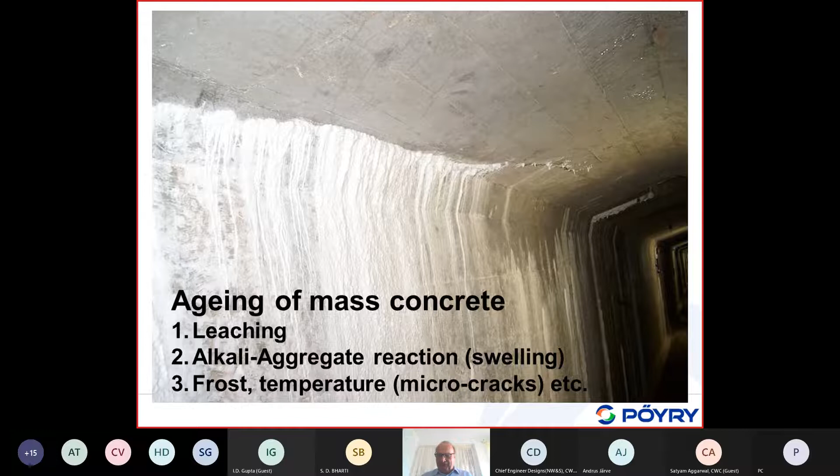If we look into some existing dams, we may see cracks developing in concrete dams, top gallery dams, some cracks here mainly due to temperature effects. We have some leaching, or we can have alkali aggregate reaction causing swelling, or sulfate reaction in the concrete also causing swelling, and we can have frost temperature effects which cause micro cracks, basically on the surface, which will damage the surface concrete. So aging of mass concrete is one factor which is important and has to be considered.

What is the basic requirement? If we do some modifications of the dam, they are the following. Number one, the dam must satisfy today's design criteria, that means the hydrological, for example PMF, and seismic safety evaluation earthquake design criteria. Often the seismic load case has not been considered properly in older dams, as I mentioned already, so it is really necessary to do the seismic analysis if you are doing a dam heightening project. Number two, we would like to achieve that the heightened dam acts as a monolithic structure, as I've mentioned before. Number three, safety assessment of the old dam according to today's requirements. The question is, can the old dam carry the extra load?

It is important that we use today's design criteria for old dams. Some people may feel that if you do some modifications on your dam, you can still stick to your old design criteria. I think this is not correct according to ICOLD, but for some dam owners, if they want to do just the minimum, they may be tempted to argue in this way, but you should not accept that. Number four, safety of the existing dam usually decreases if you do some heightening, due to the extra water load and dead load. It is clear that if you heighten an existing dam without really strengthening the overall dam body, just adding some extra height on top, your safety will go down. It's clear.

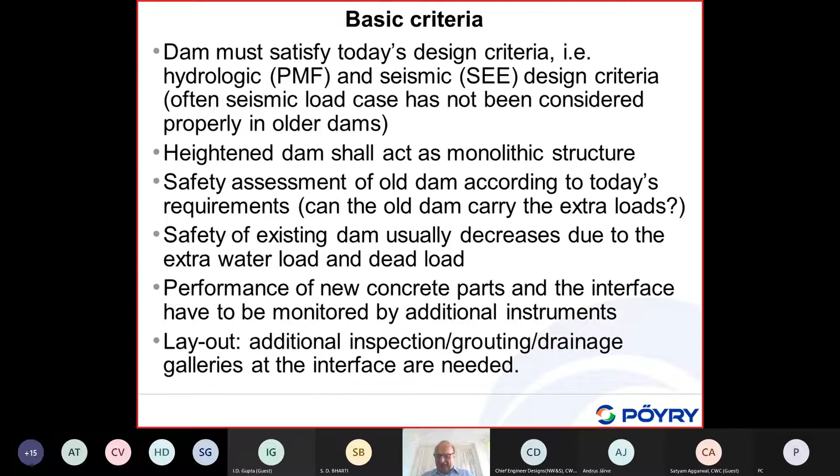And of course, if you do some dam heightening, it means you also have to do some modifications, usually with your spillway. If it is a gated or ungated spillway, you have to modify that. So it has implications not only on the dam body, but also on some other parts.

Why do we need dam heightening? As I've mentioned a few times, when dams are properly well-built and well-designed, and are properly maintained, they have a very long, unlimited service life. I would say the service life may exceed 100 years if you do not have deficiencies like aging, alkali-silicate reaction, or sulfate reaction.

Number two, the use of a dam and its reservoir may change during the economical life, and extra storage may be needed, for example due to sedimentation. We have that in Iran, in one dam project I'm involved in - the sedimentation level is 100 meters thick at the dam body, and the dam itself is 200 meters high.

Or we need some extra volume in the reservoir for flood control - extra retention volume in an existing dam, which we have done in Switzerland - or we need some extra water storage. So there are a number of reasons why people feel heightening of a dam is a viable option.

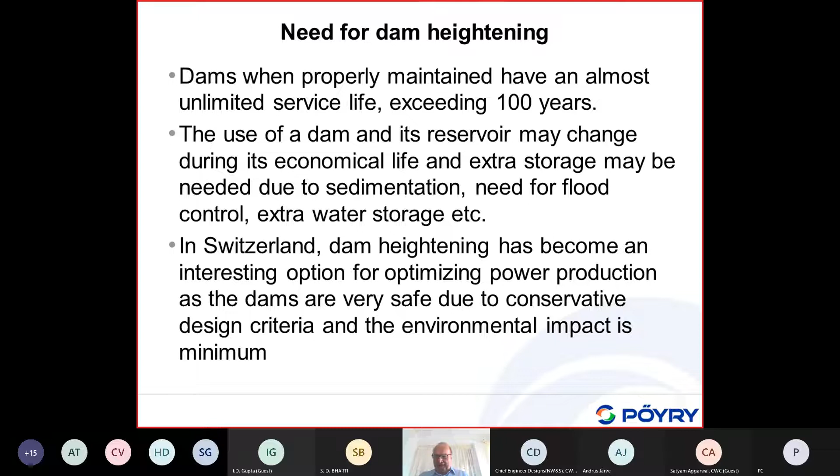In some other parts, I've been involved in a project in Sudan, between Blue Nile and White Nile. It is absolutely flat, with some cataracts. They heightened the dam by 10 meters, and the reservoir area doubled - basically the reservoir became very large, from roughly 300 square kilometers to 600 square kilometers. A huge increase only due to 10 meters, whereas in Switzerland, if we increase 10 meters, maybe we only need a few hectares of extra land. I will show one example.

What are some technical aspects with the heightening at the interface of old and new concrete? About 0.5 to 1 meter of the existing concrete dam has to be removed, as this layer may be damaged by micro cracks due to temperature, climatic conditions, and depending on the properties of the mass concrete.

We also have to look that we do not have any buildup of pore pressure at the interface between old and new, and it has to be checked by drainage, because if you have extra water pressure, it may create some unsafe conditions.

Number 3, old concrete may be permeable, and water may circulate along lift and temporary construction joints. So therefore, water tightness has to be achieved, for example by grouting of the old concrete. It is required, if you do heightening, that a clear concept be established.

Also, the extra hydrostatic pressure depends, of course, on how much the dam will be heightened. We may require modification in the grout curtain. And I would say, without changing basically the dam geometry, we can do dam heightening in the order of 1 to 1.5 times the crest width. So we think this is just a rule of thumb.

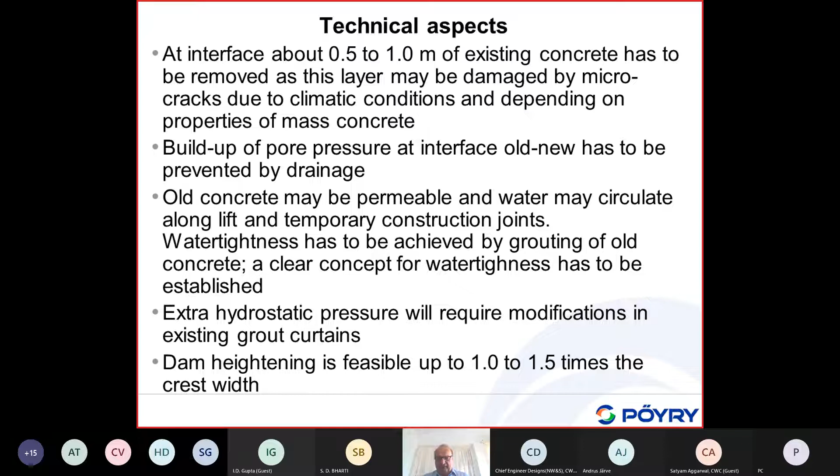If your existing dam has a crest thickness of only 4 meters, I think it is very problematic if you cannot heighten just by 10 meters. I would say feasible would be about 4 to 6 meters. But our dams in Switzerland have a crest thickness, as I will show.

What are a few further technical aspects? Timing of concreting has to be investigated in view of climatic conditions. In our case, in the mountains, and also here in India, in the Himalayas, you may have a working period per year of maybe only a few months.

So the next one is the bonding options of new and old concrete. How do you do that? One can do it by anchors, by dowels of new and old concrete, and by treatment of the interface with some kind of epoxy mortar or other techniques. These are possible solutions.

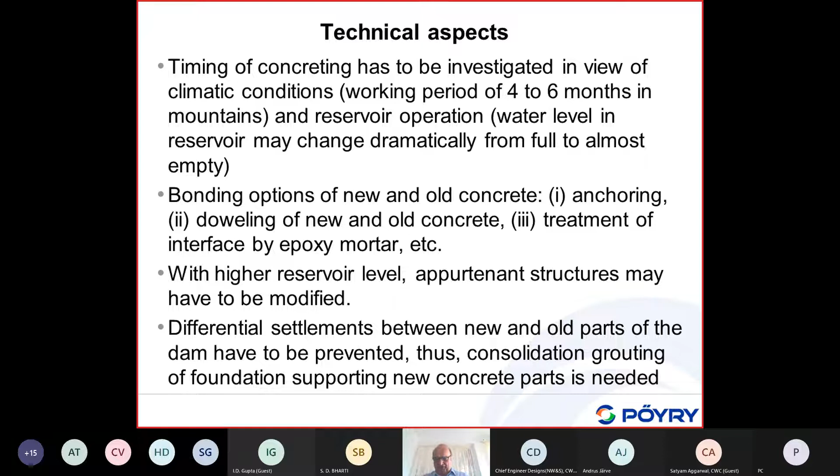With higher reservoir level, as I mentioned, appurtenant structures and spillways may have to be modified as well. Another point is related to differential settlements between new and old parts of a dam, which have to be prevented. Therefore, some consolidation grouting of a foundation supporting the new concrete parts is needed. So these are some of the technical issues which have to be addressed.

If you do modifications of the dam, you must do it according to today's design and safety criteria. What are some techniques for dam heightening? I will give a few examples.

Number one, rock anchors and post-tension anchors. Number two, shear keys at horizontal interfaces—it can be without anchor at the interface of old and new concrete, or with anchor between old and new concrete. There could be a provision of a slot between old and new concrete, or other techniques with separation of old and new concrete by a membrane.

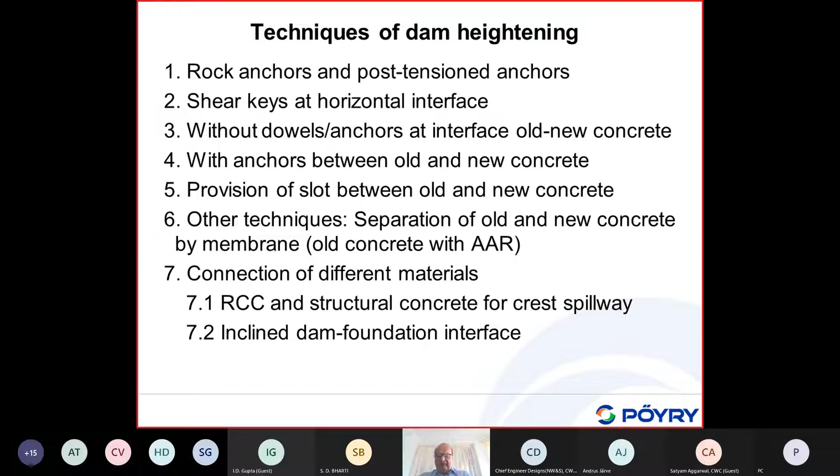For example, if you have special problems—and number seven is the connection of different types of materials, RCC and structural concrete. If you have an RCC dam body, the spillway will still be made of structural concrete, meaning reinforced concrete. So we have the interface between the spillway structure, usually a crest spillway in an RCC gravity dam, and the dam body, and we have some connections with inclined dam foundation interfaces.

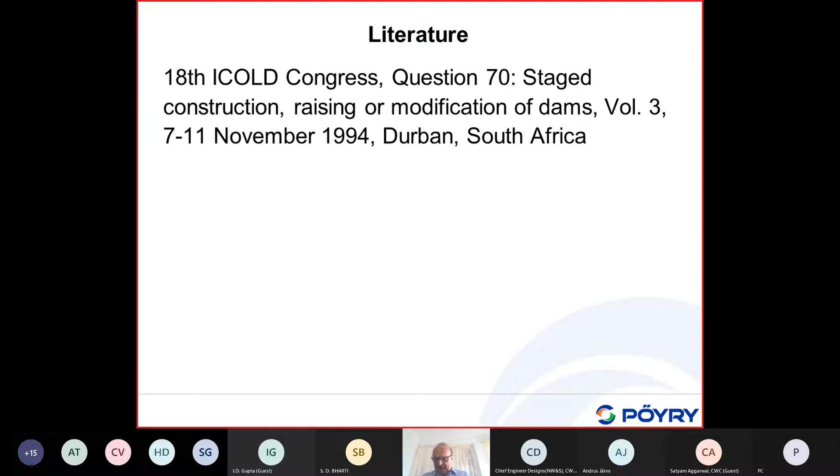I will show a few examples. Quite useful if somebody is interested is a book from one of the ICOLD congresses, the 18th congress in Durban, South Africa—already 27 years old—dealing with raising or modification of dams. If you want information on executed problems, I'd refer to that very comprehensive volume, maybe 600 or more pages, where you find a number of cases.

So let me come briefly through different types of dam heightening techniques. This is a dam which has been heightened—the whole dam body has been heightened, and as you see, it has been raised from water level 298 to 321, so 23 meters, which is quite a bit. This could be a solution here.

It is an old masonry dam, where the height was increased by adding a concrete part at the dam body. The geometry has been expanded more or less linearly with the heightening. The other approach I mentioned, what would be feasible, is 1.0 to 1.5 times the crest width—that would be heightening of a dam just locally without making all these modifications.

If you do this modification, you can heighten much more, but the problem, as indicated, is basically this interface between old and new concrete. There are also, as you see in this example, different additional works necessary with the upstream facing, the grout curtain, and the drainage system.

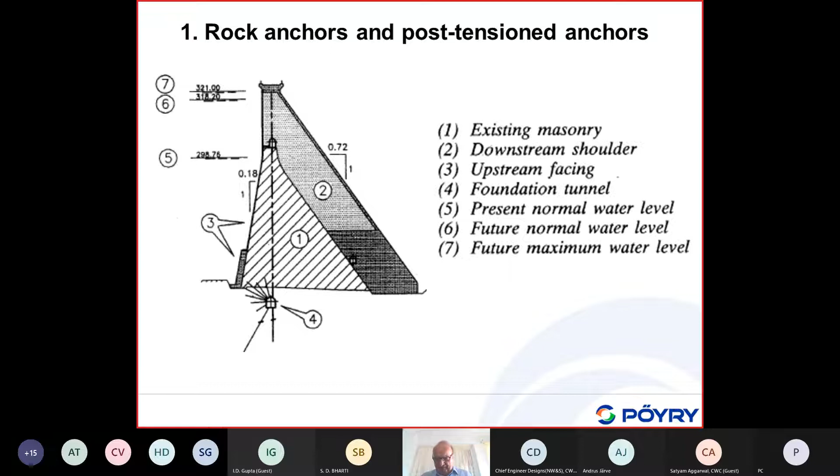This is a dam which also has been heightened—I almost forgot, this was connected with rock anchors. Rock anchors have been provided, so by post-tensioning you can achieve compression and a good bond at this interface, which we saw this morning. The lift joints are usually weak points under dynamic actions.

This is another example with post-tensioning heightening, where only the top portion has been increased, about 10 meters of water level. But the dam crest was already quite thin, so a modification was done, and I must say the shape now doesn't look very favorable.

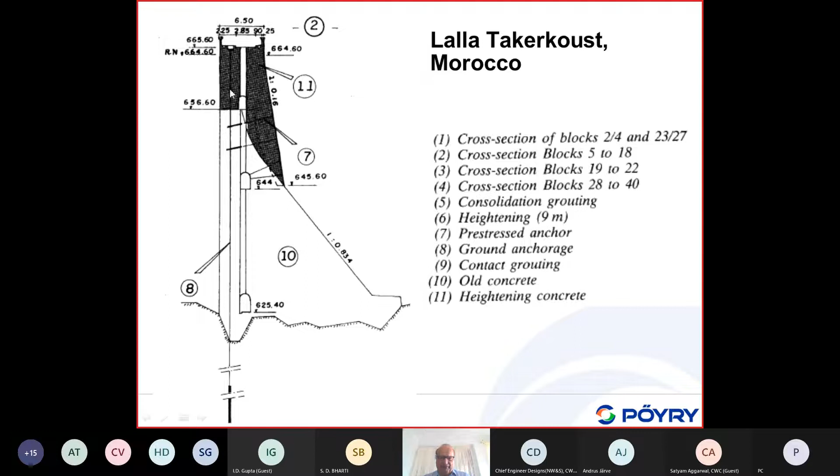It looks more like the Koyna gravity arch dam, where some cracks also developed, where people heightened the dam—it was decided to heighten it during construction, giving it this shape. This dam in Morocco looks quite similar, showing how this heightening is done at the crown cantilever, the highest cantilever, and closer to the abutment where the addition of concrete is more prominent than in the center part of the dam.

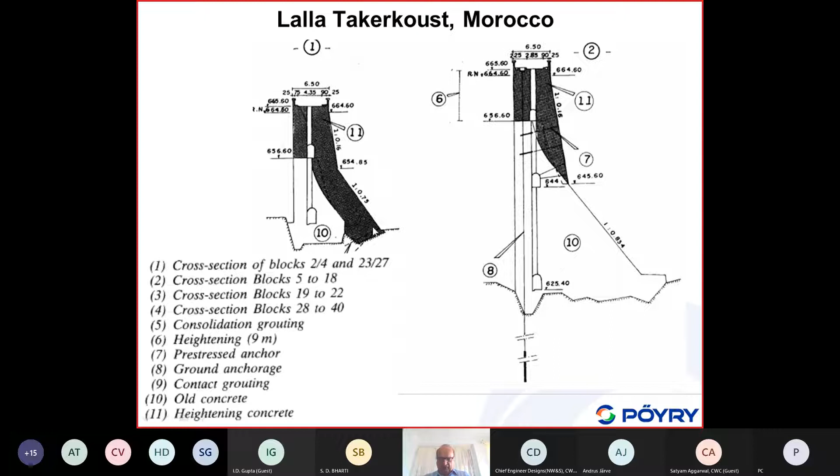Here it involves modification of the cross section, of course, near the abutments. Okay, some further details here about this post-tensioning of the dam.

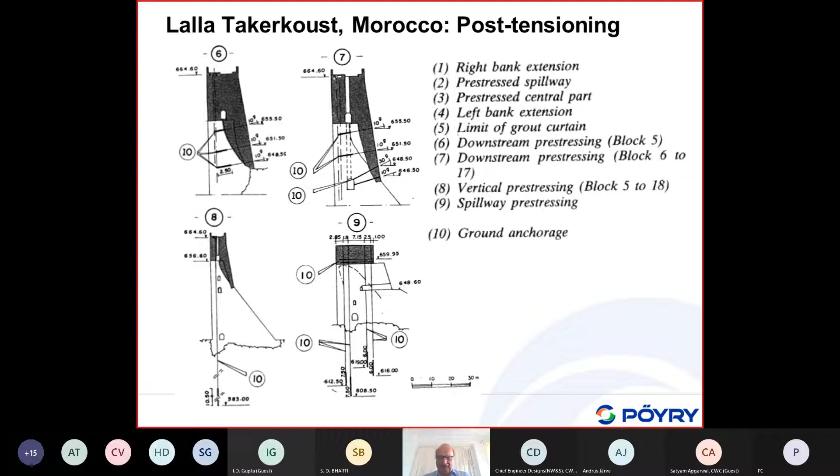I'll go quickly through that and move to the second option: shear keys. This is a dam now in Switzerland, the Mauvoisin arch dam. It had a thickness here of about 12 meters, so it is quite high. With 12 meters, we can heighten without problems 1.0 to 1.5 times the thickness. So this dam was heightened by 13.5 meters, which is roughly 1 times the thickness of the dam crest.

This shows how this additional part was added on top of the arch dam. For the heightening, it was not an arch dam which was added, but gravity blocks were put on the crest of the arch dam. So these gravity blocks do not carry the load in the arch direction, but they carry the load by cantilever action.

The detail I wanted to show here is this shear key, a kind of shear key. This is the old crest. Part of the concrete has been removed, so we have some interlocking between the new concrete and the old concrete in terms of sliding, if we look into that aspect.

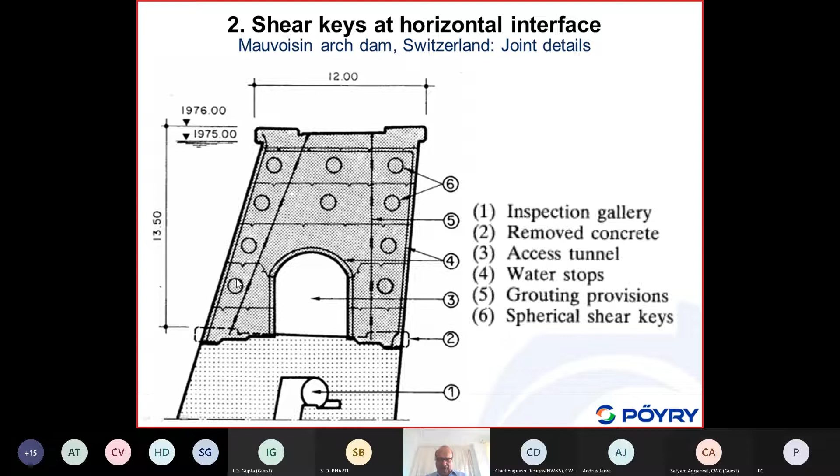Instead of round ones, we could have square elements, like a trapezoidal shape.

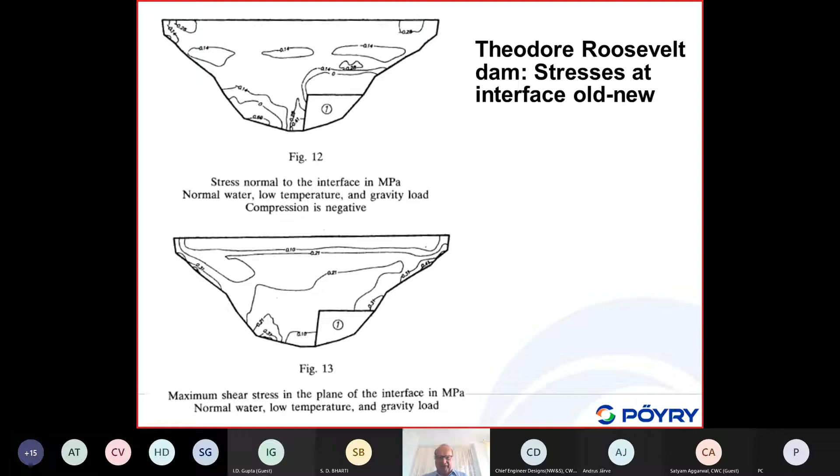So people have done some analysis showing the effect of the heightening of the dam on the stresses in this dam project. Now, one of the biggest projects heightened is the Guri Dam in Venezuela. It is a very big dam, the biggest in Venezuela. It was originally built in 2 stages.

Here you see it was built, but it was already planned for the second stage of heightening. So in the second stage, this part here was added, and it increased the dam height by 52 meters. That's a lot - the original dam almost doubled in height. Of course, this is only possible if you have already taken some measures before, or it is easiest if you have planned for that already at the time of construction, so you can minimize the effort for this dam heightening.

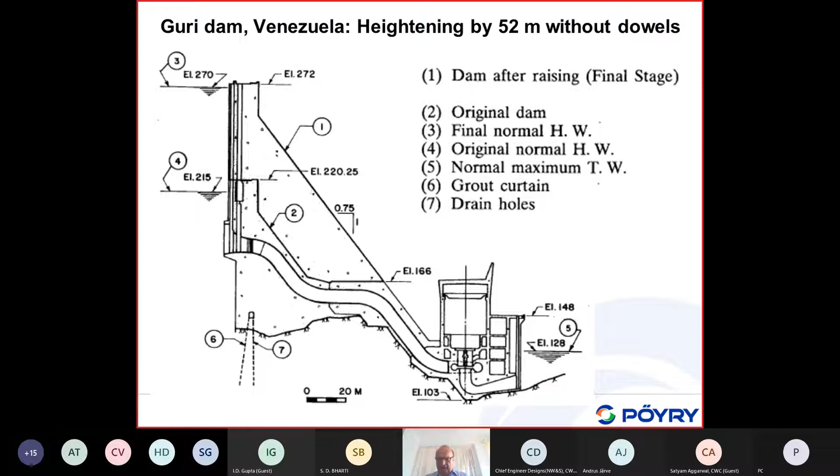So this is probably the dam with the greatest capacity which has been heightened. But heightening is quite popular, let me say, if the construction takes a lot of time and you can already do power production during construction of your dam, so that you have already some income.

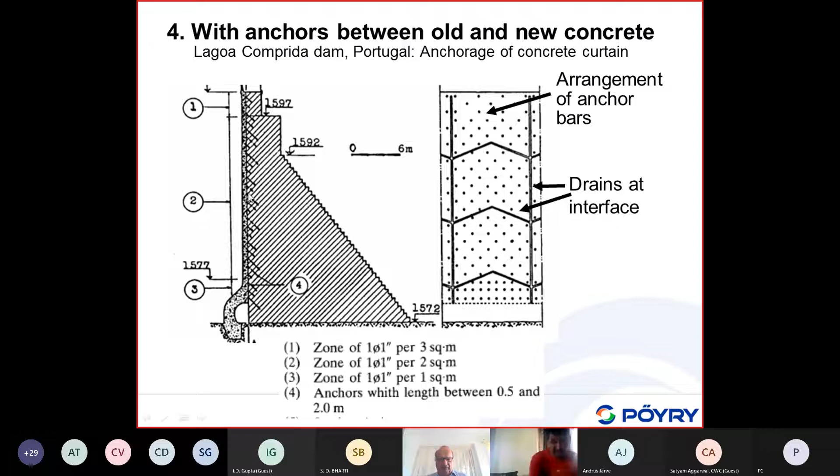There are some examples of heightening a block here, with anchors or dowels between the old and new concrete. Due to pore pressure buildup, drainages are provided, and anchor bolts ensure a good connection. The anchor bolts are also a bit problematic - they should be almost stainless steel, because at the interface, if there's a gap, you may have signs of corrosion.

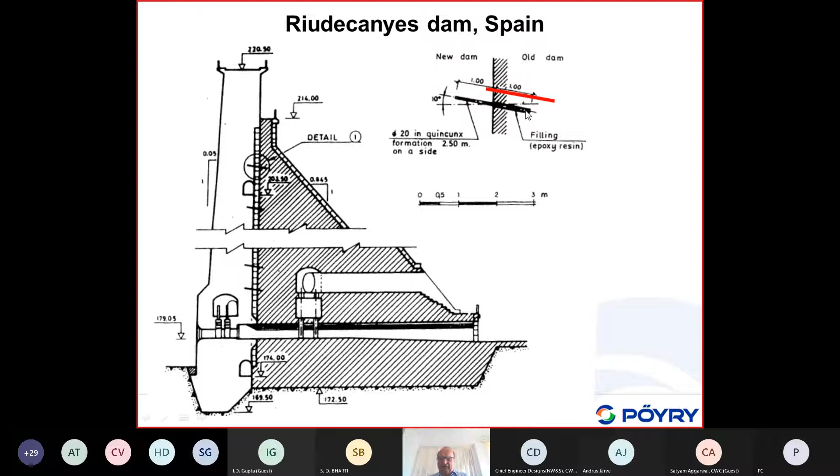Also with bolting, this part here has been added. So there are many ways to do that, and the connection between old and new has been done by dowels, grouted here with some epoxy mortar.

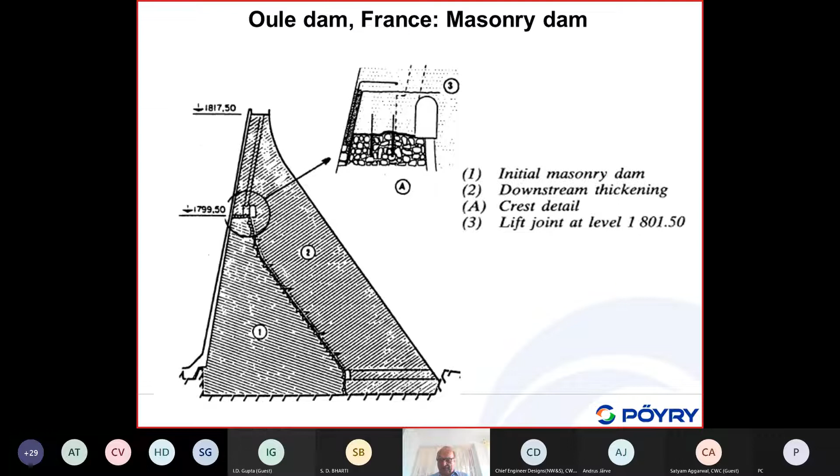This is a connection between concrete and a masonry dam in France, where dowels have also been provided to connect that. In a case in Japan, part of the original dam was added.

Of course, if you do this type of heightening, it is almost a new project - basically it is like almost a new dam.

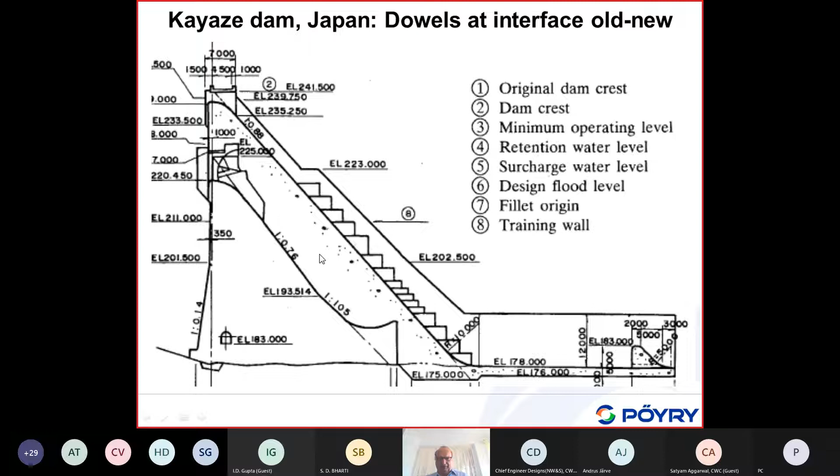We just did this in Switzerland. We wanted to connect two dams, and I'll show it. Rather than connecting a new dam to an old dam, it was decided to build a new dam about 20 meters further downstream, just to eliminate all these problems. If you do this kind of work, it's almost questionable whether it would not just be easier to build a completely new dam if you really have to make that big of a modification.

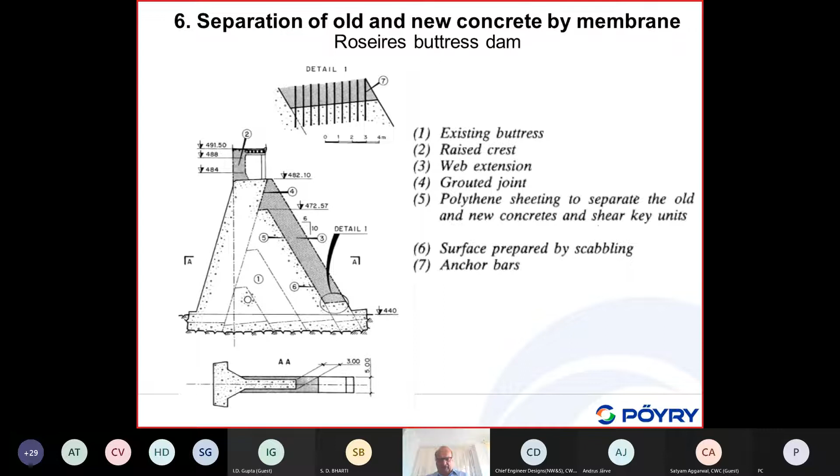Here you see the web of the buttress also had to be enlarged, and there were some plans with membranes between the existing concrete and the new concrete. This dam has actually been completed about 10 years ago, the heightening.

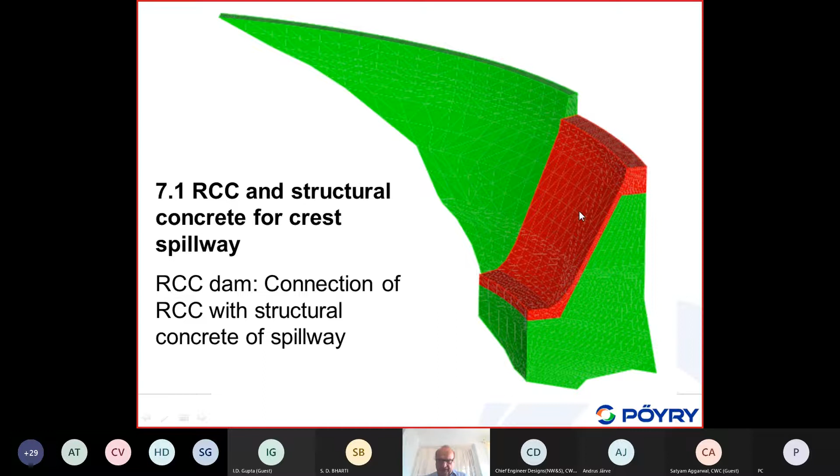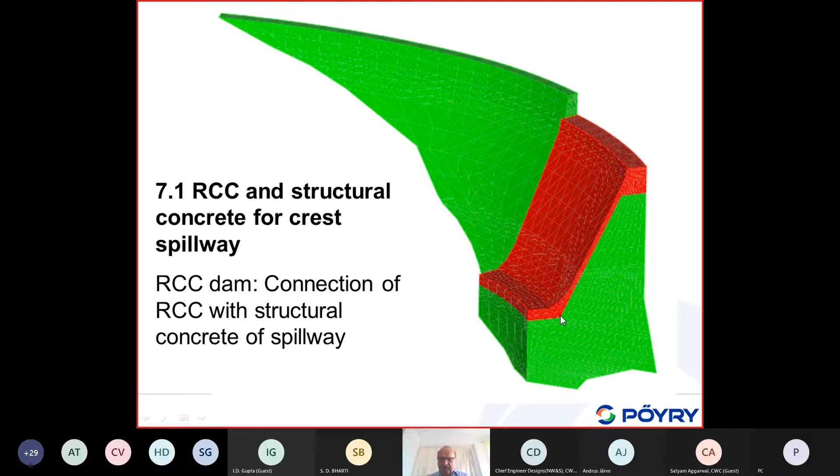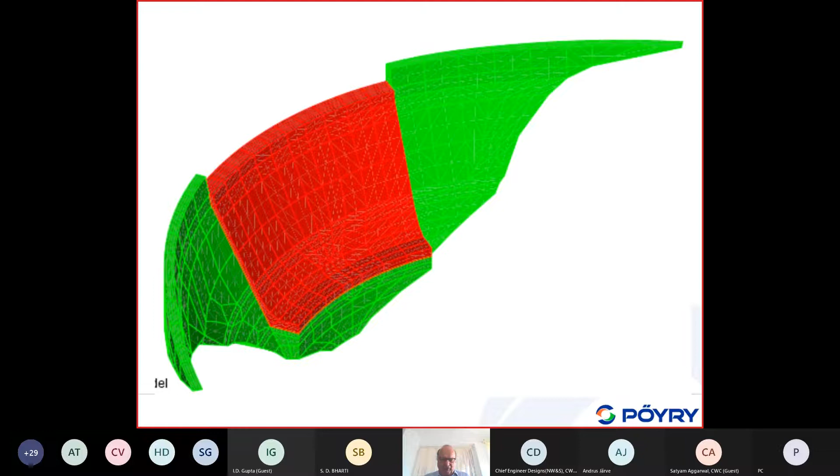But still, the dam is an RCC dam, the green one. If you have a spillway structure, it is reinforced concrete - it cannot be RCC, because RCC is basically lower quality concrete compared with structural concrete. So we have reinforced concrete here, and special attention must be taken how you connect the structural concrete on top of this RCC dam body. We proposed, at the time when it was steeper for the arch gravity dam, to have these dowels and anchor bars, which should be stainless steel, because there could still be a joint between this RCC and structural concrete, which could be a weak point for corrosion protection.

Let me come to one case - this is the heightening of the Mauvoisin arch dam. One of the problems I've mentioned already is that if you're not really excavating much, just the minimum, you have some inclined interfaces. During construction, if you have monoliths, there could be sliding stability issues with these inclined interfaces, whereas the stability of a horizontal interface is much superior to an inclined one.

The example I'd like to explain briefly is the heightening of the Mauvoisin arch dam by 13.5 meters in Switzerland. This dam actually belonged to our former company, and we did this heightening project, which was very economical, also from the environmental point of view, because you didn't need all these environmental approvals today in terms of sustainability. Everybody likes to use the term sustainability, but basically sustainability means environmental safety - it is related to environmental impact.

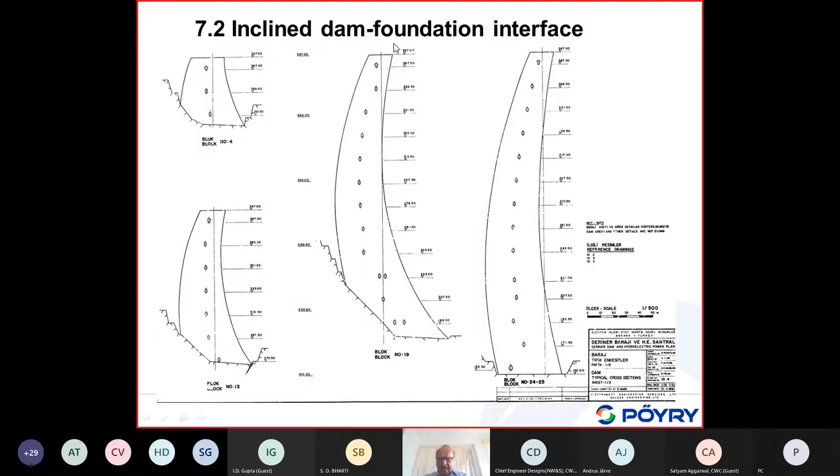You can have some benefits. What has been done there by heightening the dam? The idea was just to heighten the dam, not to make modifications. Just to heighten, because the previous ones I've shown, they changed the geometry of the dam. But here, in our case, what we think is the most economical way is that we can keep the dam shape and just add the extra height on the crest. So that is the concept which we have applied.

So what have been the working stages for this heightening? Number one, there was a removal of the crest concrete down to mass concrete of the original structure, because on the crest we have some road, so this part will be removed. Then there will be some proper cleaning of the interface, and moistening of the surface, so that we have a good bond between the old and new concrete.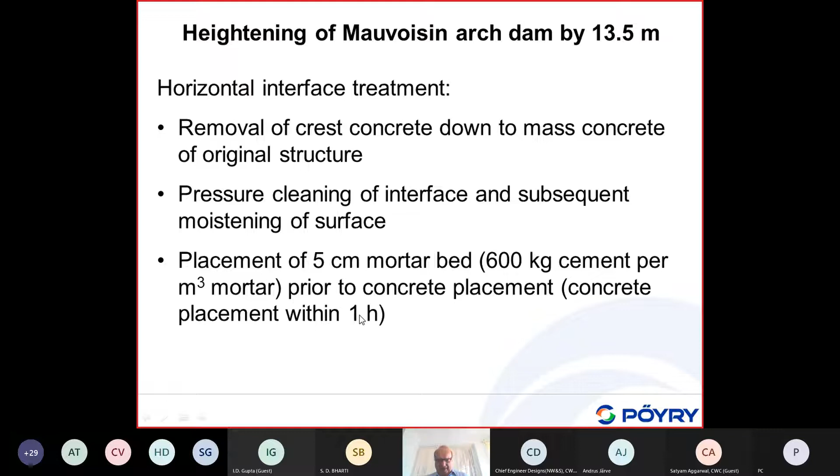This shall also be done if you do conventional dam construction at the lift joint. You should do pressure cleaning of the interface and subsequent moistening of the surface to have a good bond at the lift elevation and at the interface between old and new concrete. Here, as detailed, first they put a 5 centimeter mortar bed with quite high cement content, prior to the concrete placement. Little time is given so that the bond between the old and new concrete and the mortar is guaranteed. So this work had to be done very fast.

This is the Mauvoisin dam, and it is already heightened here. You can see this is the heightening of 13.5 meters. It's also in the mountains, could look like in North India. But the dam here is 250 meters high. It is one of the highest arch dams in the world, and when it was built, it was already the highest in the world.

But it was built in a very massive way in the 1950s. It's over 60 years old already. So it was built very massive, as I mentioned once already for those who participated in a previous presentation.

I said in Switzerland we also had some design requirements, minimum requirements specified by the military, by the army. The military requirement for the big Swiss dams is that the thickness of a dam must be about 14 meters, so that it is capable of withstanding the largest conventional weapon. That comes also from the attack of the British on the German dams, but at that time, I think the largest bomb was about 2.5 tons of explosives. Here in Switzerland, we thought of 10 tons of explosives.

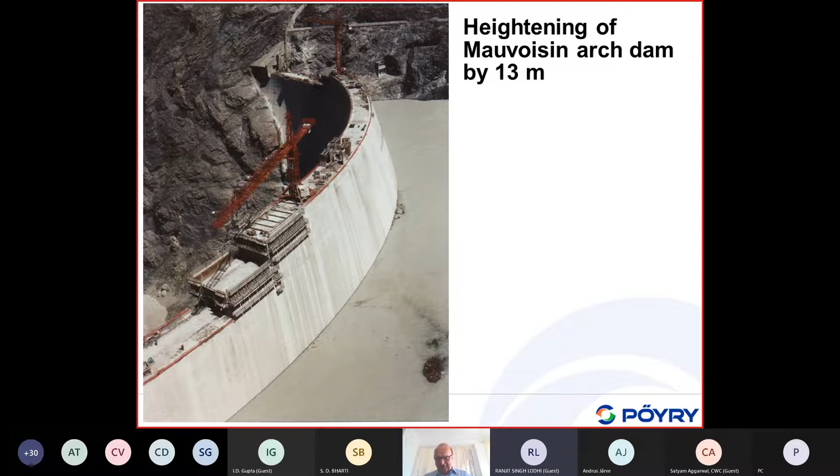There was some modification on this specific type of spillway which was used. The difference between Switzerland and India, or foothills of the Himalayas, is that our floods are very small compared to yours, so our spillways are much smaller than the ones you have in the Himalayas.

Here we see, I've shown this photo before, just a cross section. We see here we have these spherical shear keys, and here an opening access road, you can say the top gallery, and it was left open. It was a relatively large opening.

Of course you can save concrete, but it's not just to save concrete, it is also for dissipating the heat of hydration. So with that big opening, you had better control of the hydration process, the heat of hydration of the concrete.

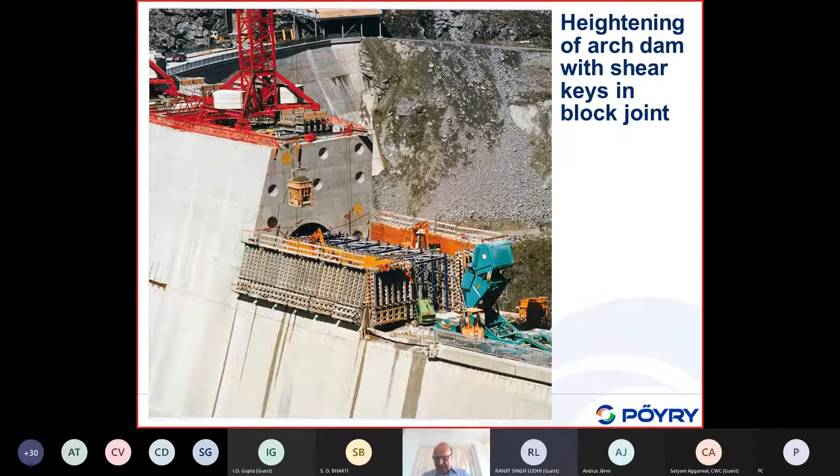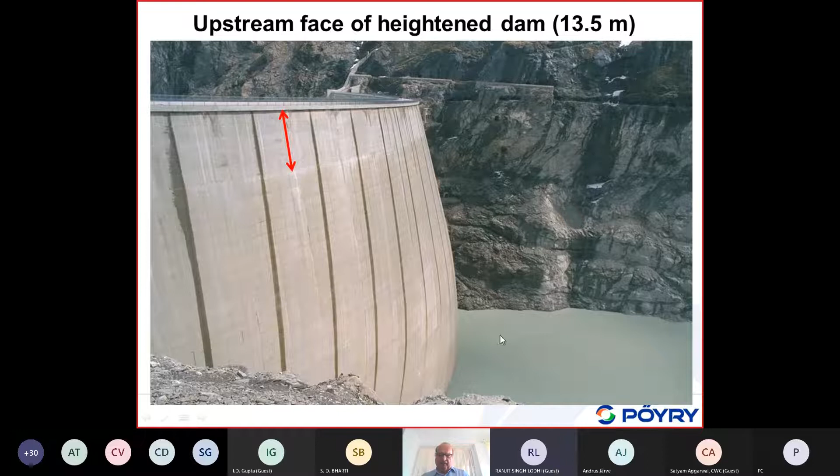This is, it looks the same here. This is the heightened dam, the reservoir empty, from an upstream view. This heightened dam still looks very nice.

This is a picture I've taken maybe 20 years ago, and it shows this is at quite high elevation, over 2,000 meters, so the climate is such that the concrete looks quite fresh. Also, the old concrete here is already at least over 50 years old.

It looks quite fresh. You know yourself, if you are in tropical countries, within 2 years it doesn't look that nice, if you have algae and so on, all kinds of things growing on the concrete.

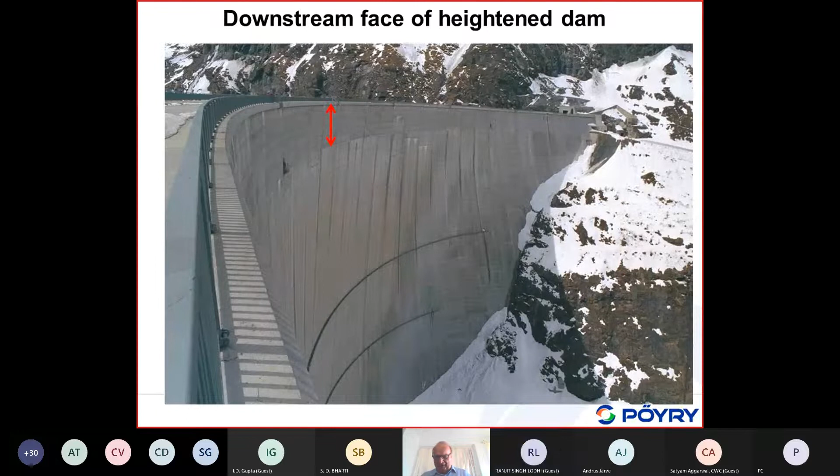Okay, this is once more this cross section. I've shown this access road which we have built here, this tunnel. This tunnel has quite a big cross section.

Of course it is not just for trucks to come through, but it also helps minimize some concrete and minimize some thermal effects due to heat of hydration, as I've mentioned already. The normal gallery has more or less an elliptical cross section.

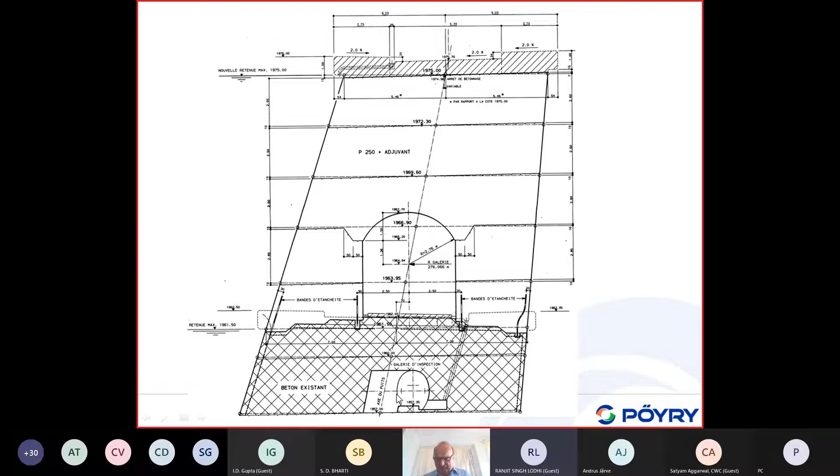This is a gallery used as an inspection gallery. Okay, this is once more this cross section with these 10 spherical shear keys.

With the shear keys, in the previous example I showed this morning, was the dam in Turkey, where some blocks may move 1, 2, or even 4 meters. Of course, when you have the shear keys, it will prevent the relative movement of blocks.

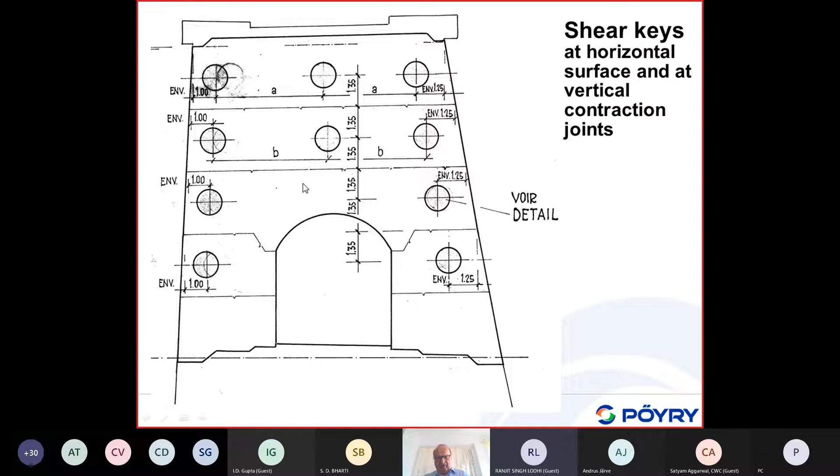These are gravity blocks. It is not an arch action here in this case.

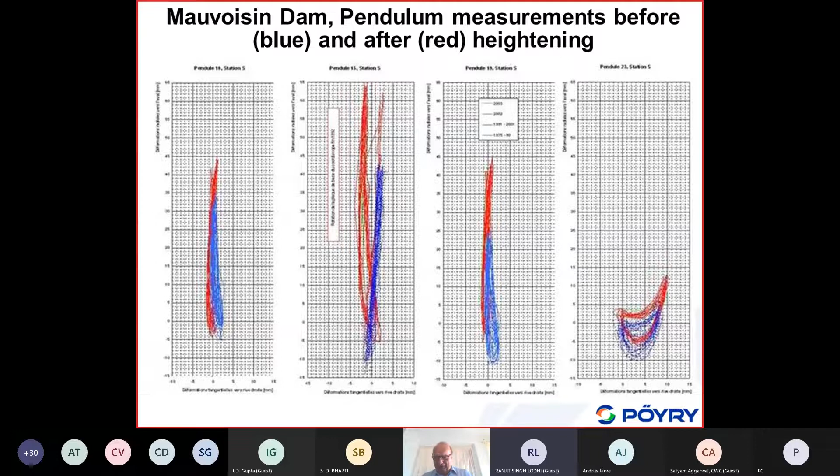Somebody asked me once about the deflection of the dam, but here it is very difficult to read the maximum. For this dam, 250 meters high, under full water load, the maximum displacement was about 15 or 18 centimeters. So we do not talk about large, we do not talk about half a meter for a 250 meter high dam.

Now this is our dam, which is now under construction. It had some, let me say, unusual performance. This dam was built in the 1930s, and it was decided, planned also 20 years ago already, to heighten this dam by a lot, 23 meters.

Even for heightening the dam by 23 meters, there was a lot of opposition here because it is in a somehow protected environment. All these environments are somehow protected, so there has been opposition on this dam for more than 20 years, and it was not possible to heighten it.

But I would like to show nevertheless the project we have for heightening the dam. The heightening was not allowed up to now, but the dam had some deficiencies, so it either had to be repaired, and the decision was taken, and the dam is now under construction to build a new dam here.

So it's just a few meters, let me say 50 meters, the distance of the downstream toe with the future upstream toe, so it is almost just below this dam.

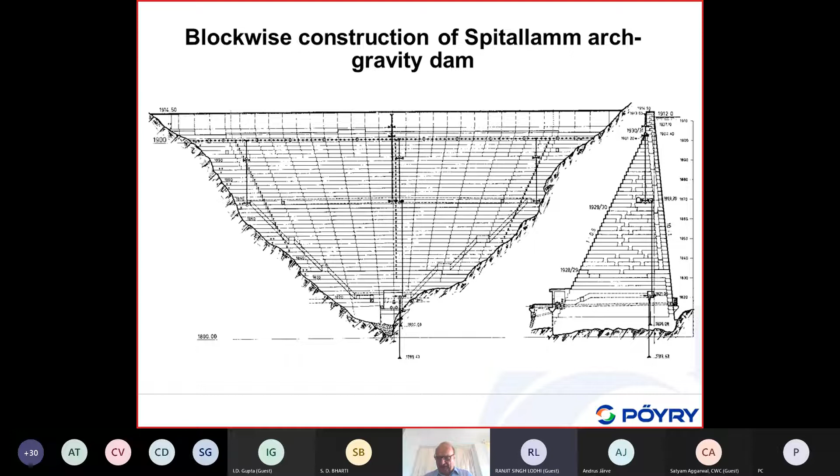So this is the dam, how it was built, and there have been shown problems appearing here and some problems appearing here, with displacements increasing as a function of time.

So some remedial measures were required, and at the same time, people came up with a project of heightening the dam. This is the dam - it looks quite interesting, like an RCC dam today, but it's conventional mass concrete, and this whole area is famous for its granitic rock.

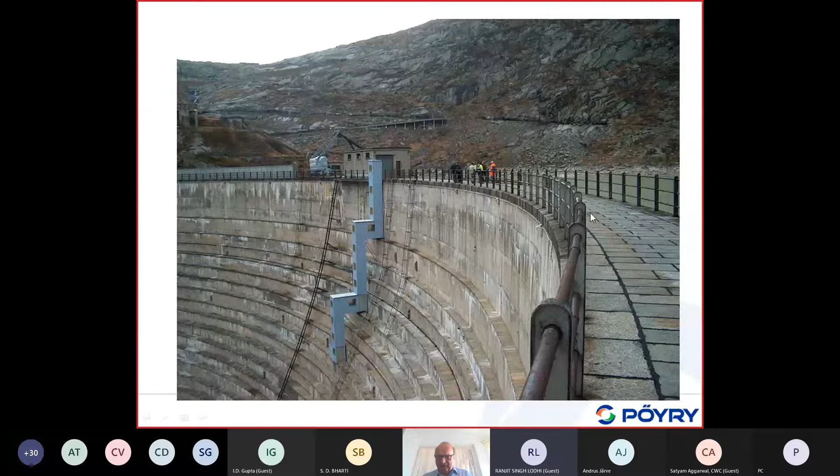Some picture of the crest thickness, also doesn't meet today's requirements - it's quite thin, but this is just a walkway for a trail, a trail from here going to the pass, which is called Grimsel Pass.

And you see here at the upstream face there were already a number of repair works done with some leakage. Because of these deficiencies, you can also see some aging of this concrete here. Some repair, some upgrading was required of this dam.

So what were basically the concepts considered? The concept, from 2005, 16 years ago, was decided to heighten the dam here. This is the heightening, but for the heightening they first also demolished some part of the old dam here.

It was called the red part, which was considered to be removed from the existing dam, and on top of that, the red one being removed, was the blue one. This here is an arch gravity dam, as we have seen, but now the project was to superimpose more or less on top of this arch gravity dam, an arch dam with double curvature.

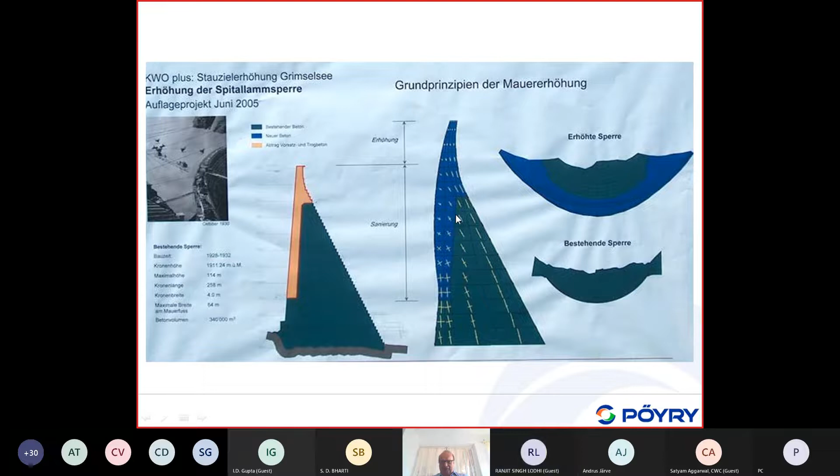So this was the project. The owner was quite confident that this dam could basically be built, but there was opposition.

There were about 20 or 25 rare trees which were only growing there because they built this dam already 80 years ago, at an elevation where otherwise there are no trees. Anyway, some trees were growing, and by heightening of the dam, these trees would have to be cut down - only a small number of trees, I must say.

Therefore the project - there are some other reasons, but one of the most important was because of these 20 trees. As compensation, the dam owner was ready to plant another 1,000 trees.

This was not accepted. You think in India you have already a lot of opposition for some dam projects, but we think we have even more. You just don't hear about it - that's the difference.

But here, for the heightening, people looked already in some detail at concreting lifts of 2 or 3 meters, I think 3 meters probably, these lift elevations, and a time schedule was already done for controlling the heat of hydration.

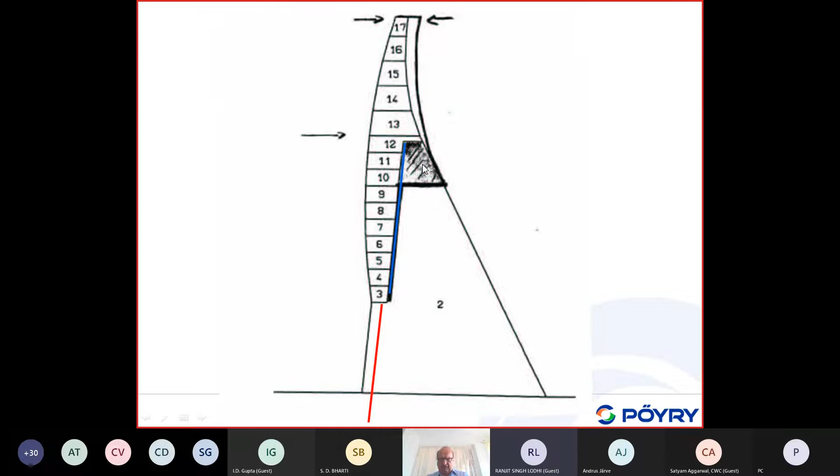And as I'm showing here, a problem of course was this interface between the old and new concrete. And here are just some modifications in the dam geometry, because we thought it was too thin, and it would probably be better to remove this part of the dam crest to have a better dam shape.

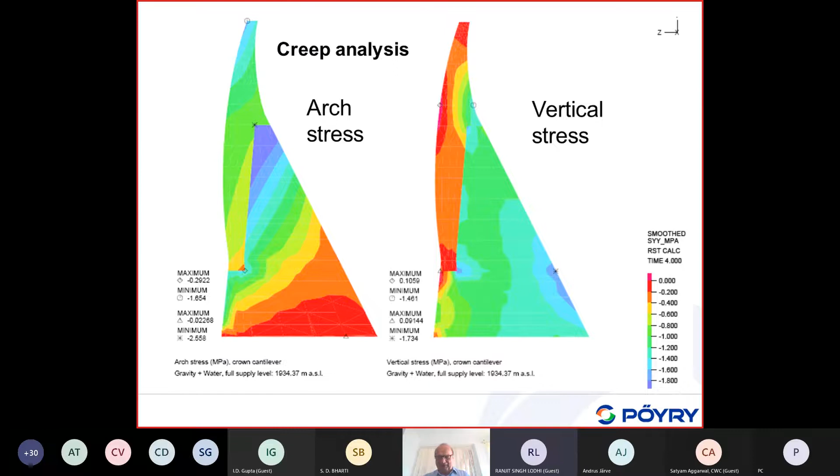Okay, so we did quite a number of analyses, creep analysis, arch stresses, and looked at old concrete, new concrete, taking into account different actions and heat. It gives an unusual pattern of stress distribution. These are arch stresses in the circumferential direction, and these are vertical stresses. We've done a number of 3D analyses, and we were most interested in the stresses at the interface between the old and new dam, which had to be ensured by rock anchors. Here, this is some normal stress.

We can do different types of modifications, but superimposing a double curvature arch dam on top of an arch gravity dam, as shown here, is quite unusual. It has been done for one dam, but in this project, after about 10 years, it was scrapped because it was not allowed to heighten the dam by 23 meters. So the new dam being built now has exactly the same height as the existing dam, which had some technical problems.

Okay, what are the conclusions? Modification of dams, either to strengthen or to raise them, is done rather frequently. I forgot to mention the case of Mauvoisin Dam, which was raised 13.5 meters.

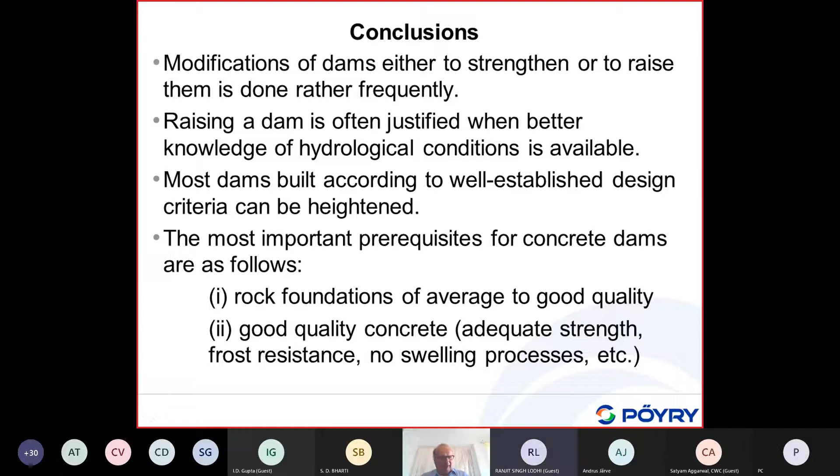In addition, additional monitoring equipment should be provided at the interface. Some monitoring instruments, like pressure cells between old and new concrete at certain locations, gave results that could not be used. So it's not a good idea to provide pressure cells, but people usually propose all kinds of instruments, and modern construction methods should be evaluated, such as pre-stressing anchors, dowels, and so on.

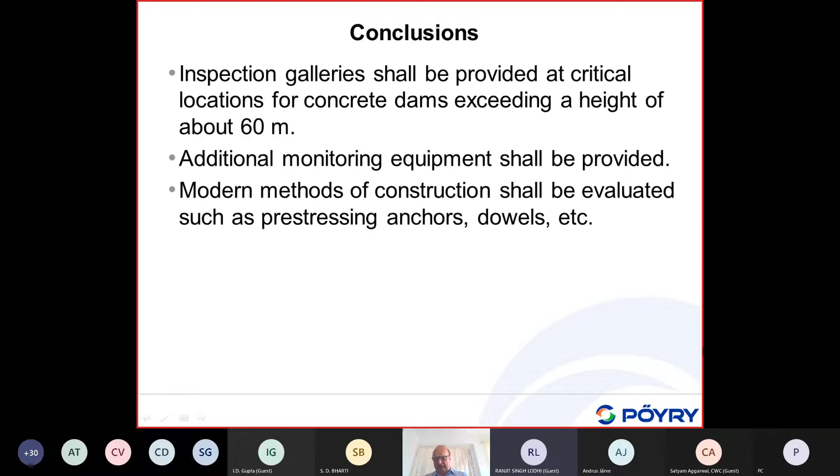So these were a few ideas about dam heightening, and it's clear there are two important issues to sum up. If you do dam heightening, it has to be done according to current design specifications, not the old ones.

This is quite important, and some people do not really... I must say, some owners prefer to follow the old design guidelines. I've been involved in some nuclear plants - there's already an older one in Switzerland, and they needed a new or redundant cooling system. They said they want to have exactly the same specifications as at the time of construction, 40 years ago.

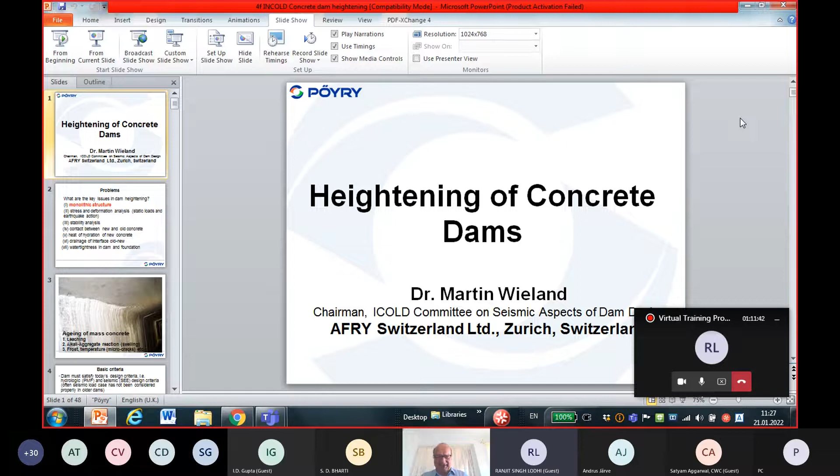This is needed to have the approval of the authorities, otherwise it would require a new relicensing and so on. If they would follow all the new guidelines, they rather preferred to have it upgraded using the concepts used at the time of construction. There are quite a few discussions on this issue, and it is clear that between old concrete and new concrete heightening, the corresponding seismic safety analysis will be more demanding than that of a new dam.

So let me come - I think we have about 40 minutes more. Let me come to topic number 5 here, which I would like to present.

So I would like to say a few words about uncertainties in seismic analysis of concrete and embankment dams, where we have the main uncertainties. I think it is quite important because some people feel we have to do the seismic hazard analysis as accurate as possible. Some other people feel we have to use finite element models to be as accurate as possible, and so on. And of course, if you only improve one discipline, it does not improve the accuracy of the results of the analysis, or give a better assessment of the seismic safety of the dam.

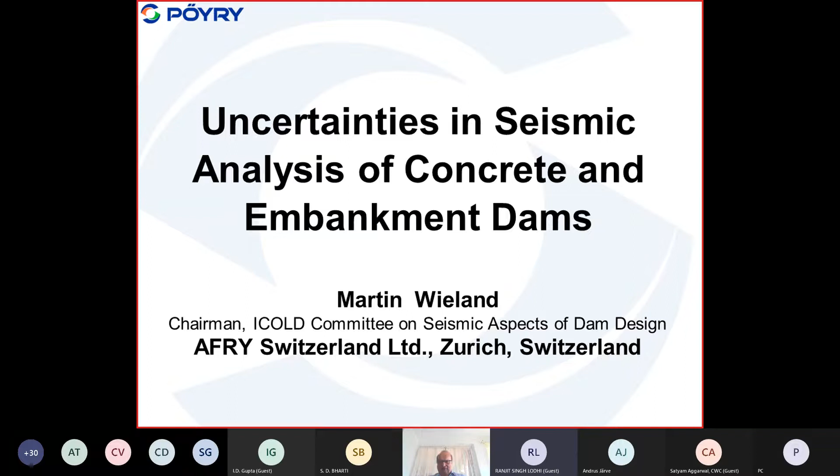And I would like to address that. I think it is quite important.

If we look into uncertainties in the seismic analysis of dams, we can consider different types. Number one, uncertainties from seismic hazard and seismic input - here I talk only, for simplicity, about ground shaking, because that's basically what seismologists focus on, and that is also in most cases what engineers are using. We do not consider faults, rock falls, or other features which may be even more important. So we already have some uncertainties here, in addition to ground motion uncertainties in the seismic input of the dynamic analysis.

Then we have uncertainties in the structural modeling. Finite element models for static analysis are relatively simple compared to dynamic models, where we have radiation damping and structural damping - difficult issues which come in addition to the static analysis, which is relatively trivial compared to the dynamic one.

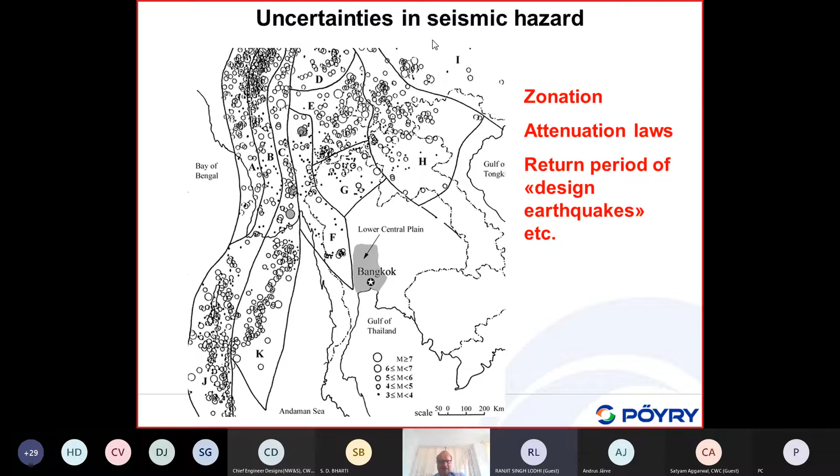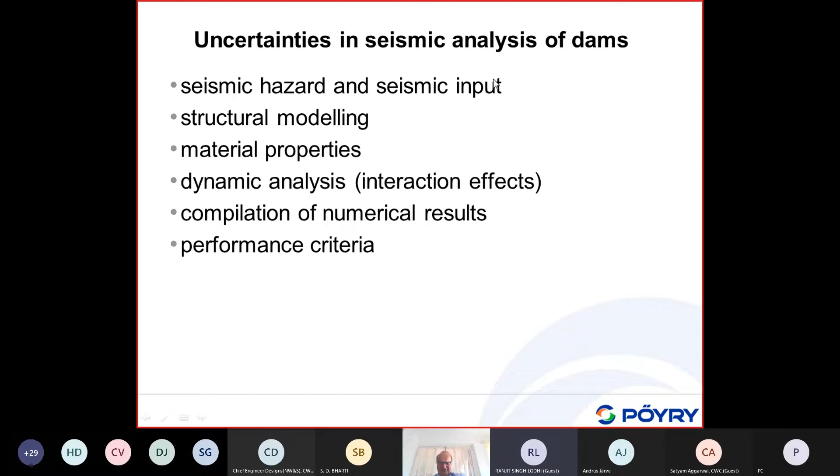I've marked here in the previous slide just one uncertainty in the seismic hazard, but in the course of the seismic hazard analysis, you come up with a lot of sub-uncertainties, if I may say that.

Now, if you look here, this is from Abrahamson. He made a kind of estimation of what kind of ground motion we consider. Do we consider mean value, or do we consider 84 percentile values? That means mean plus 1 standard deviation, or 2 standard deviations, or 3 standard deviations.

There are quite some uncertainties. If you see here the mean value, for example, this is the spectral acceleration at the period of 1 second for a magnitude 7 earthquake at a focal depth of 10 kilometers, we get the ground motion peak value of 0.3 G, but the standard deviation is quite large. It gives 0.54 G for 1 standard deviation. If you consider 2 standard deviations, it's 0.94 G. If you take 3 standard deviations, it is 1.63 G. This is a factor of 5 here.

So if you define the ground motion, it's a question of what kind of reliability level of peak ground acceleration you are actually using. At this time in ICOLD, we say if you use a deterministic analysis, you use median plus 1 standard deviation. You would use these values.

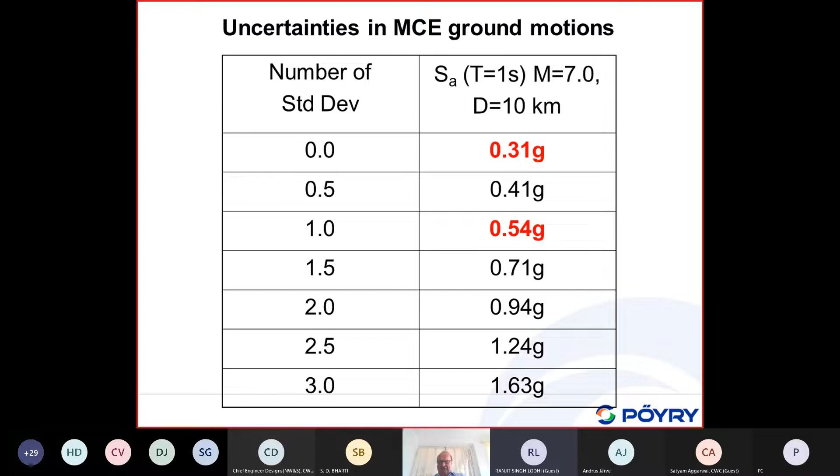But if we use the probabilistic seismic hazard analysis, we say the ground motion parameters are the mean values. And the mean value is slightly higher than the median value, maybe about 0.4 G. So there are different values being used for different design spectra, and as you can see, the impact of these standard deviations is quite large.

Therefore, in practice, for seismic hazard analysis, people are using so-called logic trees, so that you can give different weight to the attenuation laws by different authors. Usually we do not have this information to give different weights, so we give equal weights to all these different ground motion prediction results from different ground motion prediction equations.

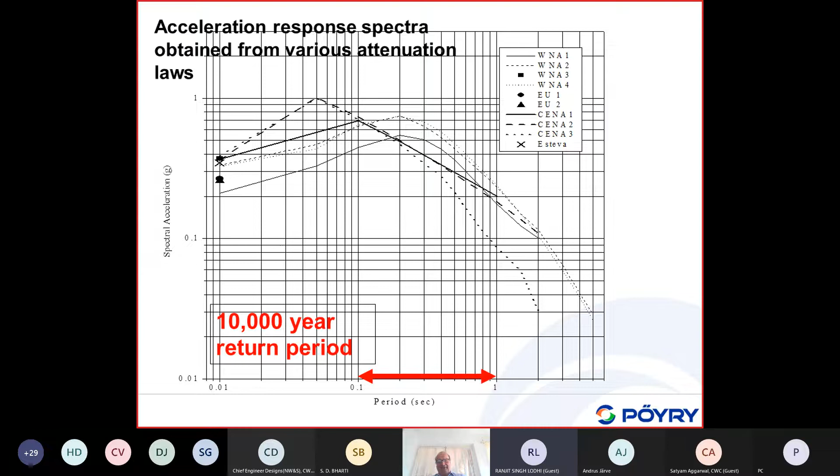So we already have these uncertainties, and as I've said, the idea is then for the analysis to do spectrum matching of the acceleration time histories. If you are not too familiar with the response spectrum, the situation is that from the seismic hazard analysis, we will basically get a response spectrum. This ground motion prediction equation allows you to define response spectra for a certain damping ratio and for a certain confidence level - mean values, median, mean plus 1 standard deviation, 2 standard deviations, and so on, as I've shown before.

So we defined these spectra already, but for nonlinear dynamic analysis we need acceleration time histories. The situation is there is an infinite number of acceleration time histories which can fit this spectrum. So it is not so straightforward to select an appropriate one.

Some people like to use recorded acceleration time histories, which they modify in amplitude and with some phase shifts so that they fit this target spectrum. This can be done, but much depends on what the recorded accelerogram actually is.

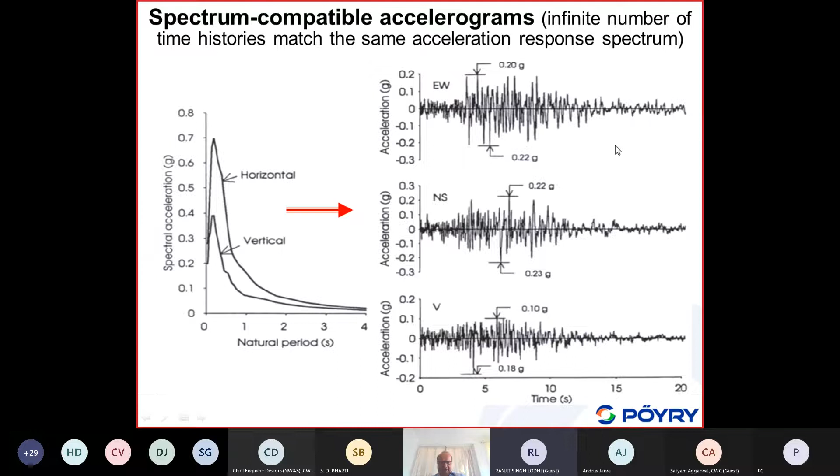So the duration, I must say, is one of the key issues.

So we have a lot of uncertainties in the seismic hazard analysis, as you have seen here. And there are, I would say, battalions—well, I'm a little skeptical here—huge numbers of seismologists working on attenuation laws and on improving seismic hazard analysis, really a large number, even more than civil engineers doing dynamic analysis.

But these people often do not know what the engineers actually need. They are doing extremely sophisticated models, and I must say today the models have become so sophisticated it is even difficult to understand them properly.

I have been involved in one such project—I was even interim project manager for about a year—of one of these studies. It was, I would say, the world's most detailed study ever carried out. They spent about 20 million US dollars on a seismic hazard study for 4 sites involving large numbers of seismologists. The result was such that the owners of the nuclear plants were not happy with it.

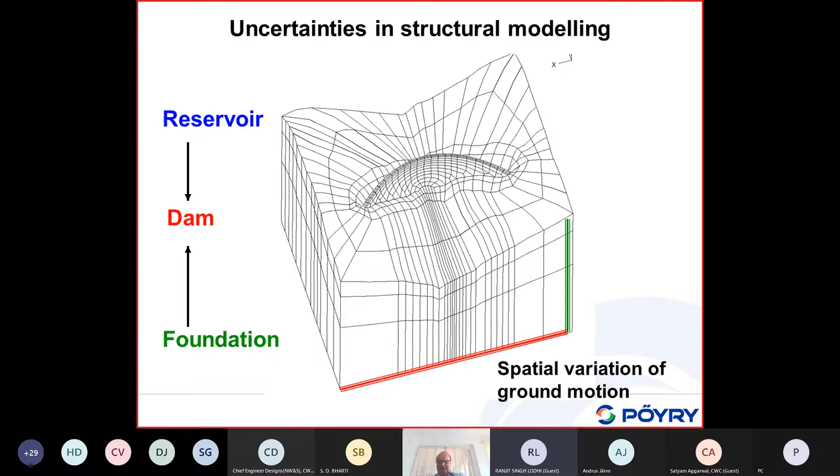It's quite a headache. If you do dynamic stability analysis of embankment dams and look into the stability of critical wedges or slopes, the question is what critical slope you have to consider. Some people who just look at the results will say you only have to look at the slope with the lowest safety factor, but for the safety assessment of a dam this is maybe irrelevant, and often is irrelevant, yet people just do the analysis that way.

So for the safety assessment, you need to identify a slope edge or wedge which is critical in that it can cause a safety problem for the dam. You do not have to focus on critical slip circles that are just near the surface with a low safety factor but don't affect dam safety. So basically we have to look into that—this is also another type of uncertainty.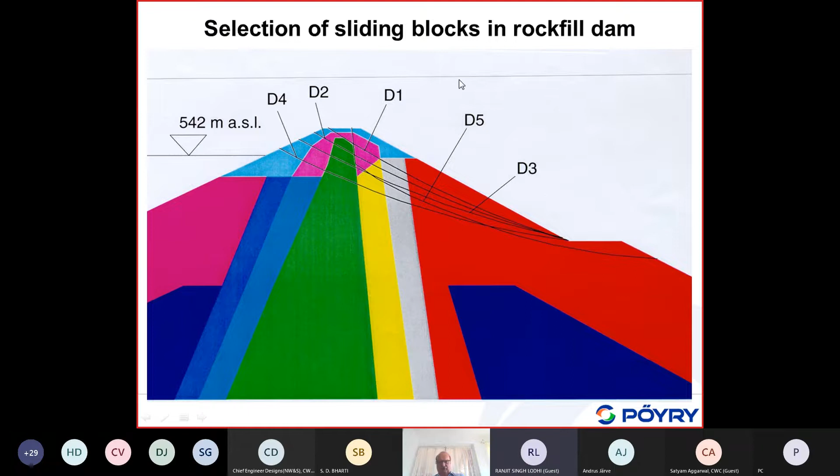Often I see people just look at the lowest safety factor, which is just a shallow slide. It's harmless, it's nothing, it doesn't create a safety problem. But if you have a deeper one crossing the core, where we can have internal erosion problems, it's much more critical. We have to look into those.

So what are the uncertainties and errors in deterministic dynamic analysis? We have different types of analysis. We have a pseudostatic analysis, which does not account for dynamic properties. We have a response spectrum analysis, which just combines the peaks of different modes and has some limitations on proportional damping, and we have the mode superposition method. Similarly, we can do a frequency domain analysis, which has some advantages for the earthquake input. And I must say the most versatile method that exists is the direct time integration method. So for linear, elastic, or nonlinear problems, basically it is all direct time integration method.

So we already have some uncertainties in the method of analysis. Now this is just a case, yes this is the right one, an example I've shown already a few times: nonlinear dynamic analysis.

We can also do, as I discussed this morning, a nonlinear dynamic stability analysis, like this arch gravity dam in Switzerland, where people assumed some of the cracks had already fully developed. Under earthquake loading, we will have a rocking and sliding motion, and at the end of the earthquake, the upper portion may have moved some distance along this interface. One would then have to assess whether this displacement into the upstream direction is an acceptable one.

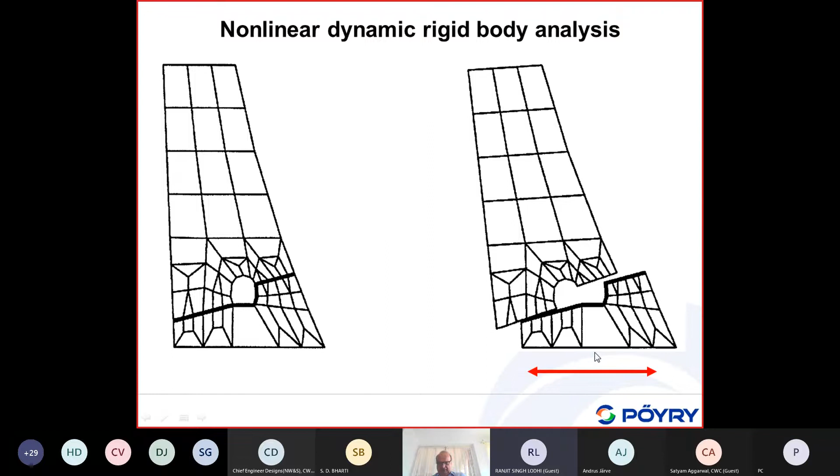Here is just to give you some idea about the sensitivity and the uncertainties in the dynamic response of this problem. What if you use different types of earthquakes with the same response spectrum, spectrum-matched acceleration at this location? If you take an earthquake with a duration of 15 seconds, 25 seconds, or 32 seconds, and we assume this earthquake acts once from right to left, and once the same acts from left to right, simply by reversing the sign of the acceleration time history.

You can see here, for 15 seconds, the time history gives 272 millimeters. If you reverse it, it's even worse, giving twice the value. For 25 seconds, 520, reversed about the same. For 32 seconds, 700, reversed 1045. What can you see here? Basically, if you have damage mechanisms, whether your duration is 15 seconds or 32 seconds, the response is basically twice as large.

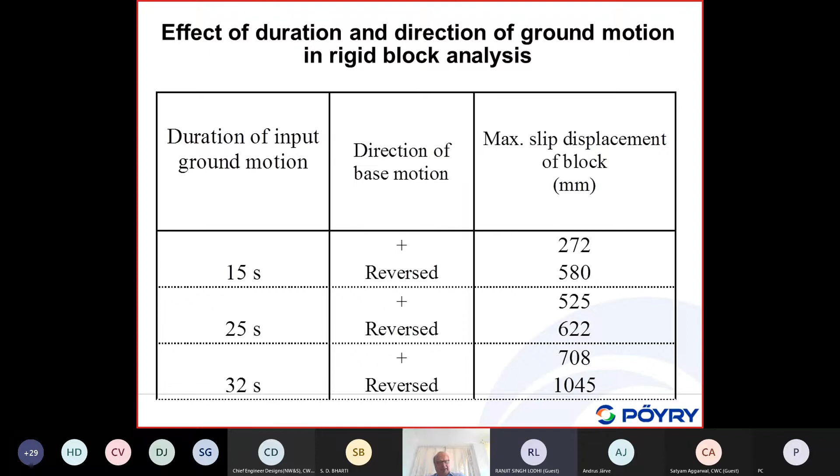Duration being twice as large means the inelastic deformations are also twice as large. Therefore, in a dynamic analysis, most people who check it do not know that if you select just a short duration earthquake, your inelastic deformation can be decreased a lot. If you just take 5 seconds, you may get only 100 millimeters, whereas if you take longer, you may get 1,000. So the duration of strong ground motion in a nonlinear dynamic analysis is a very key factor.

That is with the analysis and the seismic input. Now let me say something about uncertainties in the dynamic material properties. This is just some laboratory tests, for some clay material, and you see we have quite some bandwidth. Please take into account this is a logarithmic scale, so this bandwidth is from about 400 to 2000 - it's a factor of 5. It's not small, this is a factor, these are factors, not percentages.

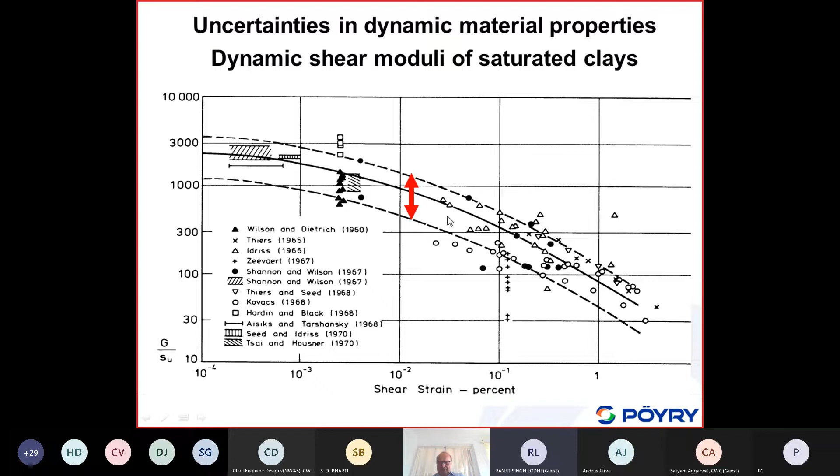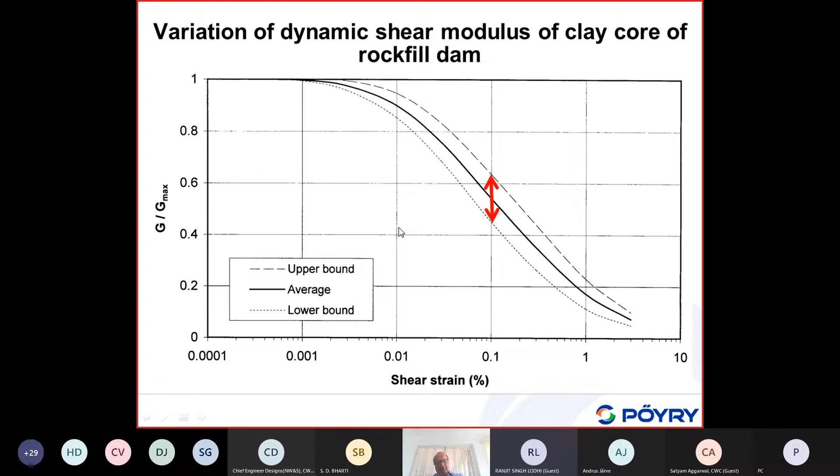So in the material models we have a lot of uncertainties. In the seismic input we do not have variations of factors of 5, but in material properties we can have very substantial differences between upper and lower bound values. Similarly, this is what has been used in the analysis for the shear modulus - usually we use a lesser variation, but it's still relatively large, 0.65 to about 0.45, also 40% or so. Similarly, for the damping ratio, we also have quite some spread between upper and lower bound. For a shear strain of 0.1, we get a variation from about 20% damping down to about 10% damping.

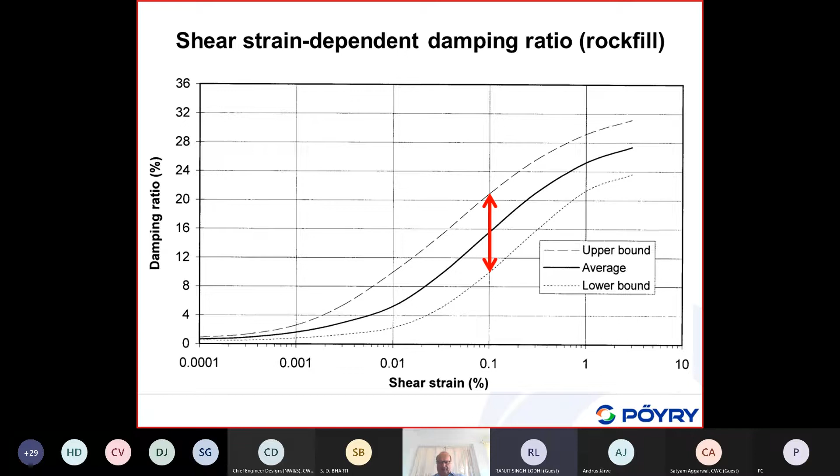It affects the dynamic response quite substantially. I've shown that at the very beginning, and I've shown this slide for those doing the dynamic analysis of dams. This is a concrete arch dam in Turkey, also 250 meters.

Just for comparison purposes, we have analyzed the stresses in this dam, maximum principal stresses, due to seismic action for empty reservoir condition, and we have looked into what is the effect of the damping ratio on the maximum stresses, considering a damping ratio of 2%, 5%, and 12%.

5% is typically used in some guidelines, like in Switzerland. 2% are basically the values which you would obtain if you would do ambient vibration tests or forced vibration tests - you would get these low values. And the 12% values you would get if you would follow, for example, US Army Corps of Engineers design guidelines, where people account for, make some estimates on radiation damping into the foundation.

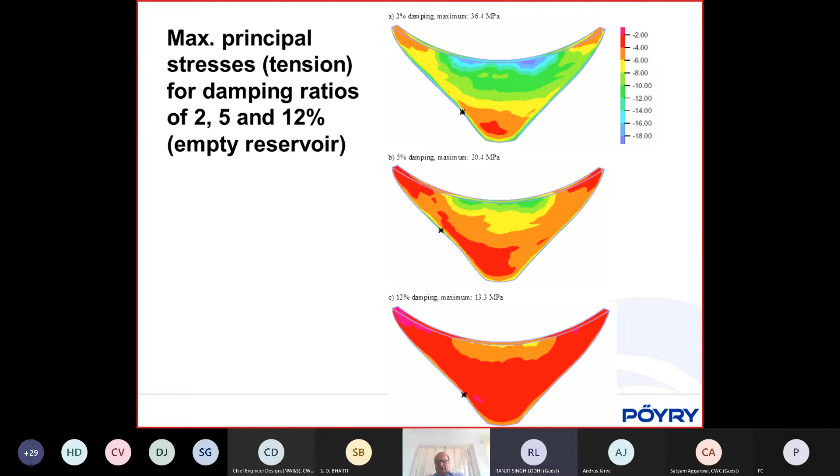So you have to be careful, but in the analysis, some people believe very much in the analysis, so they have worked a lot on it. In a nuclear plant, for example, people do the most incredible analysis, and they feel it becomes more accurate, but it is basically not the case. So it must be somehow balanced, so that the dam engineer finally is able to somehow assess these different types of uncertainties.

Okay, then there are these uncertainties in the compilation of numerical results. Shall we only look into the peak values, or shall we look at different factors? Because the response is actually a whole time history, not only one time history - it is displacement time histories, it is acceleration time histories, and it is stress time histories. So for the whole complex time history, what are the characteristic values you take out of it? Usually people just take the maximum.

And there is a question of combination of the static stresses with the maximum principal stresses from the dynamic analysis. Why is this a problem? For the static analysis, you use basically, for the static load cases, the static stiffness properties, static modulus of elasticity, which for mass concrete may be 20, 30 gigapascal. You do that for the static load combinations, and then you have to add the seismic load combination, but under seismic actions, your E modulus will increase about 25% or so. So therefore, in your model, you would have to use different stiffness properties, and therefore there is some question also how you superimpose these static stresses with the maximum dynamic stresses.

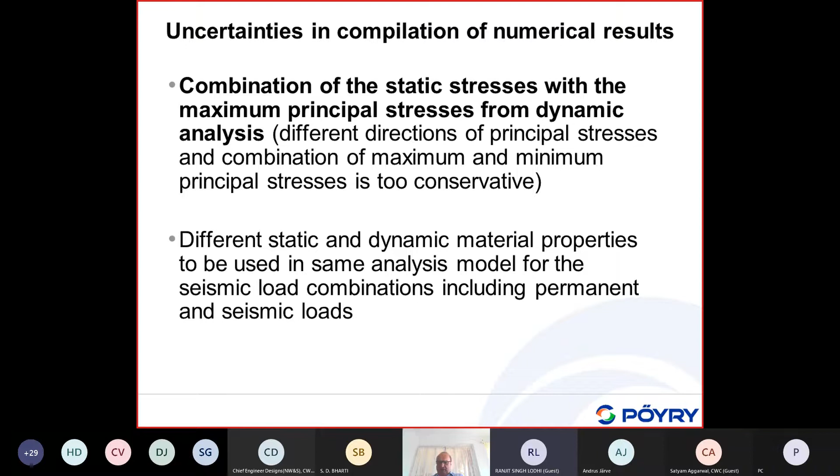The last point here is uncertainties in seismic performance criteria. In the old days, the question was: what are the allowable stresses, tension and compression, for different load combinations? It is not so straightforward. If you just have linear elastic behavior and you want to show you have no damage, you look into some allowable stresses. What are the allowable stresses?

Today, if you would do a stress test, we would look into the biaxial strength curve of mass concrete, and we would have to look basically along the surfaces of the dam where we have a biaxial stress state. We can check if the stresses are within these biaxial strength curves. But the critical zones would be combined phases, tension and compression. So there are some problems and uncertainties with the seismic performance criteria.

Also, what are the allowable deformations? Some people have different ideas. Today we cannot, like with bridges or buildings where we say span over 500 as the allowable deformation due to live loads, give such values easily for different types of dams. For embankment dams, we give some values about settlements, but these are basically static settlements. We know from static settlements that there are big differences between dams - is it 0.1%, 1%, or even 2%? The Atatürk Dam in Turkey had about 4%. So settlement can be quite variable, but the dam is still okay.

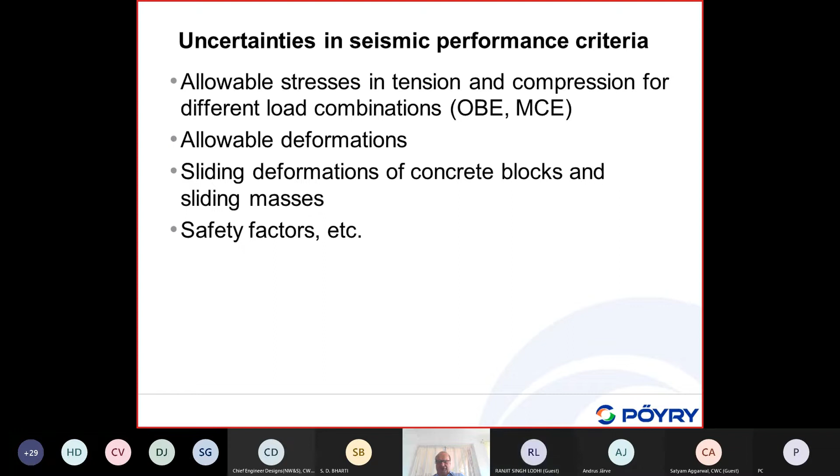It is engineering judgment. Now, because of all these uncertainties, we need what everybody talks about these days - resilient dams - because we need dams which can cope with the uncertainties. The response can be 4 or it can be 8, so we should not build a structure which will start to fail already at 4, when even 8 is theoretically also possible. So therefore I would like to show this example.

This is basically the Lower Crystal Springs Gravity Dam in the United States, in California. It's not high, 43 meters. It was completed almost 133 years ago, and it survived the 1906 San Francisco earthquake, which is a very severe earthquake.

It was undamaged, and it was only 250 meters away from the San Fernando Fault. So the peak ground acceleration probably would have been very high, would have been 0.7, 0.8, 0.9 G, I would say, if it is very close to this causative fault of this earthquake.

But the dam was built here, as you can see, as I've shown also the dam in Switzerland, with interlocking blocks, because at that time people were not yet able to cope with the shrinkage strain. So therefore you placed concrete in blocks and you have some joints here. Yeah, construction joints. So basically it is built, it looks like a masonry structure, but it is not masonry, these are concrete blocks.

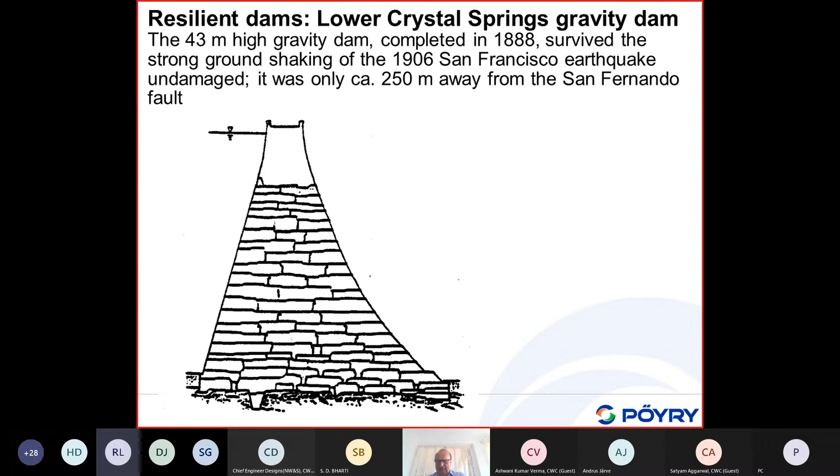So this, I would say, if we talk about resilient structures, this very old structure, I think when it was built, it was the highest gravity dam or arch gravity dam in the world. We see here this old photo, Lower Crystal Springs Dam, how it looks like. We see still some blocks here, probably. We see here these joints, how it was built.

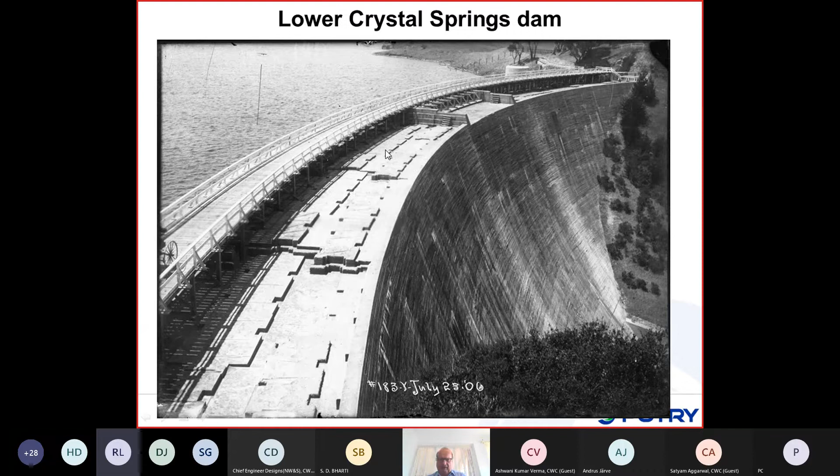Okay, now let me come to the conclusions here. You have a lot of uncertainties in this seismic analysis. So I must say, to cope with uncertainties, the dam engineer must somehow keep in mind that you have a lot of uncertainties. So he should also think about what could happen if the seismic action is larger than what has been anticipated, and that means the dam should be able to cope with larger deformations or larger earthquakes than which are assumed in the case of the design or at the time of the safety evaluation of this dam.

Just to go briefly to these conclusions. In dam analysis, models are used that are close to reality. We would basically like to analyze dams using methods of analysis which we think are quite realistic. Of course, when you have a lot of uncertainties, you still have some deviation, but it is clear, which was one of the questions asked this morning, if you use a pseudostatic analysis, we predict that basically the dam is allowed, the stresses are within the allowable stresses, so everything is okay, so the dam is absolutely safe and will be undamaged. But actually, this is not correct. So the pseudostatic method of analysis does not allow us to properly determine the dynamic response of the dam. Therefore, it is also outdated.

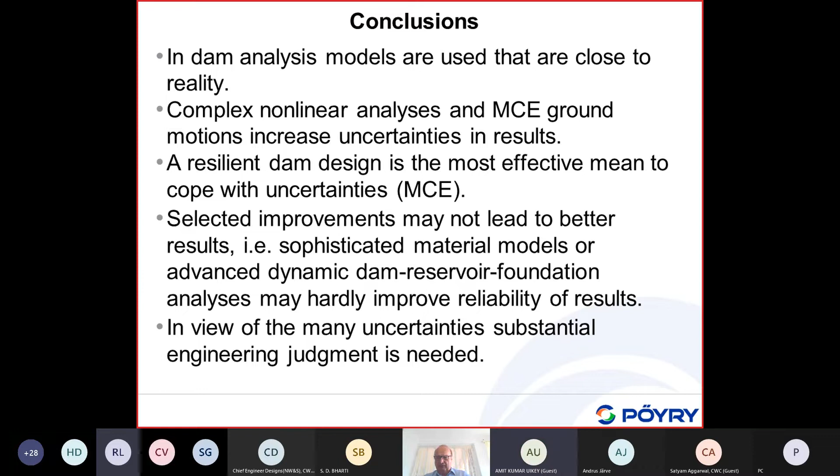So with that... sometimes it doesn't want to move. Okay, with that I would like to finish. I have almost to congratulate myself because the time is just over, and there is one presentation which I have not presented - that is on ground motion model - but you can have a look into the PDF of this presentation.

So we have still a few minutes for some questions. Please ask.

Yes sir, thank you for your nice presentation. One question regarding embankment dam foundation. Suppose, sir, if we model a soil foundation under an embankment dam, say 50-meter depth up to the rock, and assign a constitutive model like Mohr-Coulomb. Then when input motion is assigned at the base of the foundation, the inherent hysteretic damping present in the plastic model works, and we assign only a nominal Rayleigh damping of 0.2% to this model.